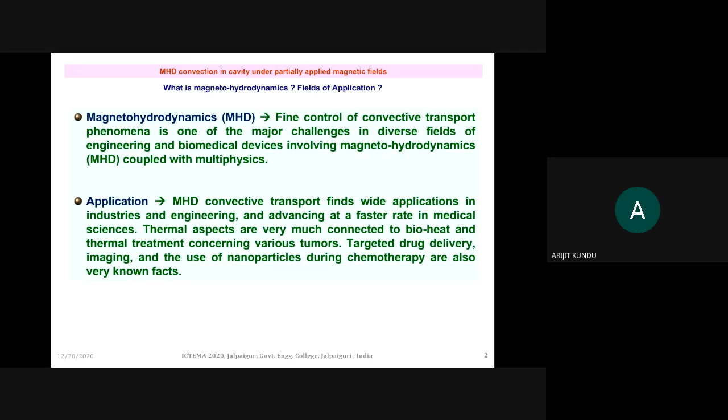Now why has this magnetohydrodynamics been considered? Day by day, although technological advancement is happening, designers are facing tremendous challenges due to miniaturization and the high demand on performance. So to control all these features, researchers are devoting themselves to optimizing performance as well as reducing sizing, so that point is taken care of.

That's why we have chosen a classical problem: a square cavity heated linearly. We have considered a square cavity filled with nanofluid saturated porous media, and we have taken this on to check whether magnetohydrodynamics can affect its heat transfer performance or not in the presence of porous media. That's why we have conducted this study.

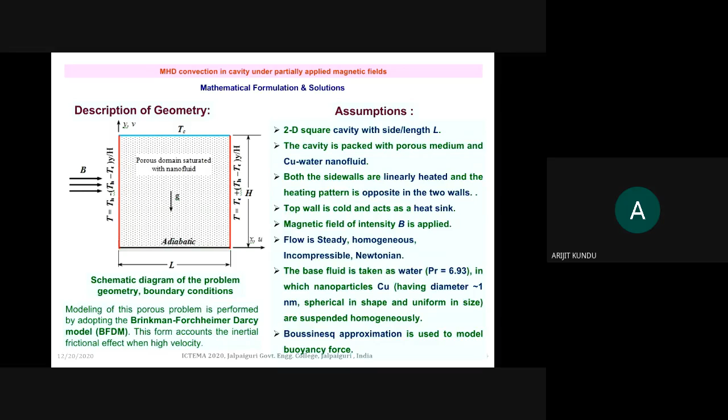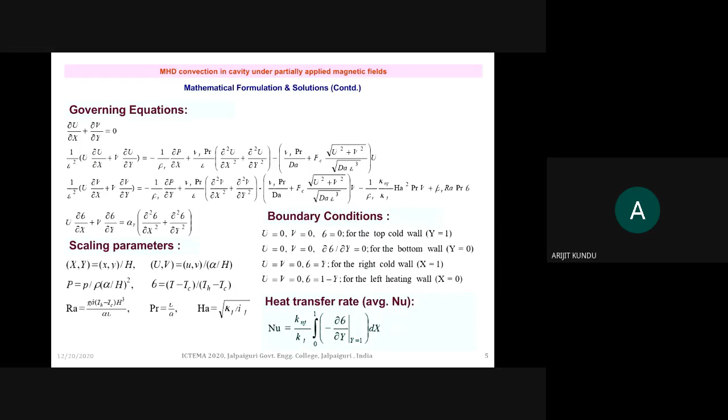Now these are the boundary conditions: isothermal temperature at the heating point, and this isothermal temperature is a function of increasing Y. So at the vertical walls, two different temperature boundary conditions have been chosen, and for presenting the global parameter of the heat transfer rate, the Nusselt number has been defined.

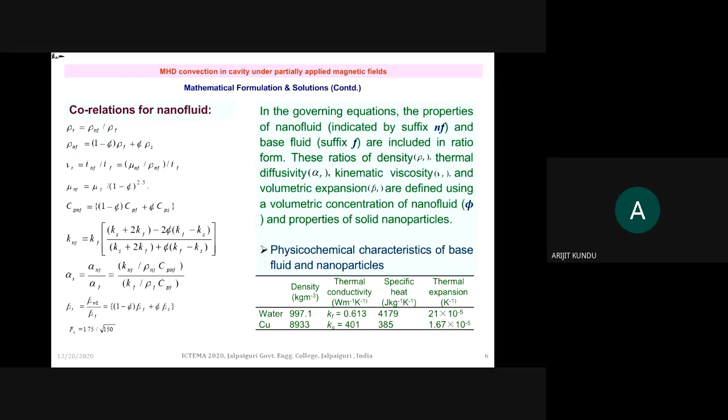Now in the governing equation, some correlations for the nanofluid have been chosen to incorporate the thermophysical properties. From standard literature, we have taken the thermophysical properties of water and copper. We are not going into detail about this.

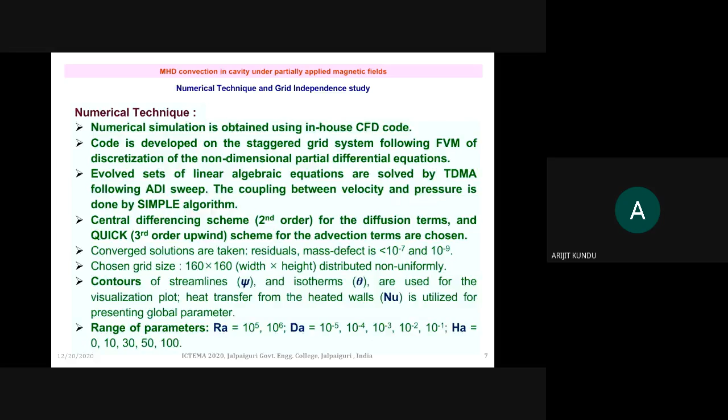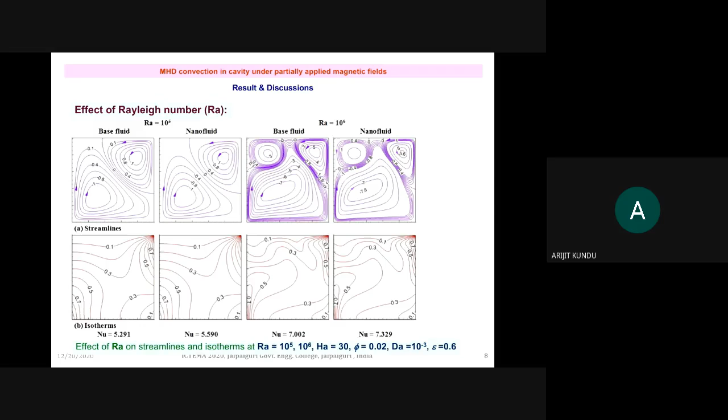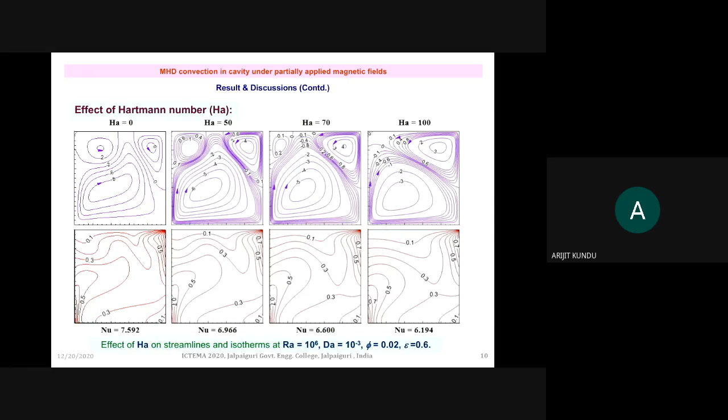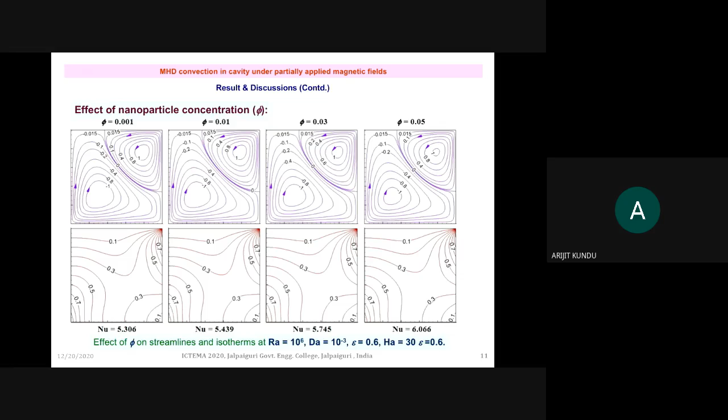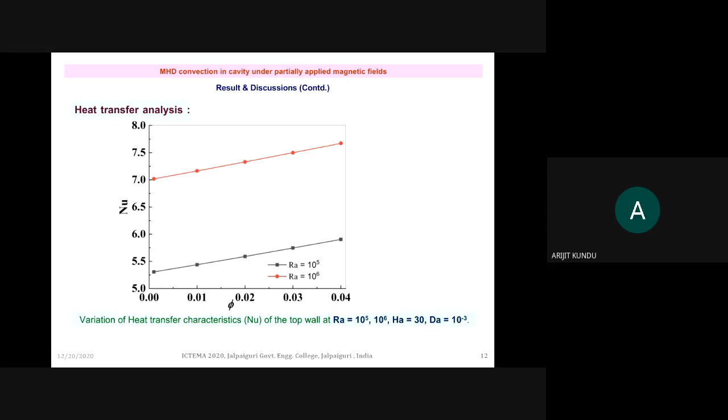From this analysis we can understand that as the Rayleigh number increases, the strength of the flow vortices increases, and this helps improve the heat transfer rate. As the permeability of the porous media increases, resistance to the flow field decreases, so heat transfer rate also increases.

With the inclusion of nanoparticles, heat transfer rate increases substantially. But in the presence of Darcy medium as well as in presence of magnetic field, this heat transfer rate decreases, keeping other parameters fixed. When magnetic field increases, heat transfer rate substantially decreases.

Finally, the effect of heat transfer with increasing nanoparticle concentration shows significant improvement. With this temperature condition, we can realize that the impact of Hartmann number as well as Darcy number have a significant role on heat transfer performance. So the outcome of this study could be helpful for designing new devices, and it will be very helpful for the designer.

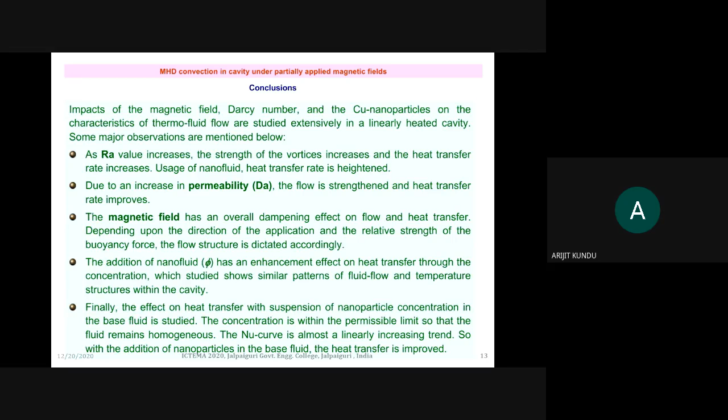So some of the references are presented here, and thank you for listening.

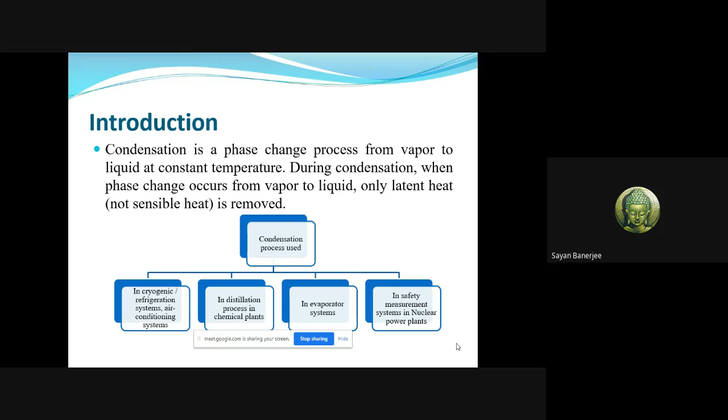This condensation process is used in many systems and processes such as cryogenic and refrigeration systems, air conditioning systems, distillation processes in chemical plants, evaporator systems, and nuclear power plants, especially in safety measurement systems. In nuclear power plants, there are water cooled nuclear reactors such as boiling water reactors and pressurized water reactors, where LOCA, that is loss of coolant accident, appears as one of the main accidental scenarios.

During this situation, due to less water circulation, water vapor is released at very high temperature and high pressure. This water vapor over-pressurizes the containment and threatens its integrity seriously. So the water vapor is required to condense very rapidly to maintain reasonable pressure, and PCCS, that is passive containment cooling system, and containment water spray systems are such systems that provide rapid condensation during this situation. So condensation process is very much required in nuclear power plant safety measurement systems.

Our objective is to investigate the effects of non-condensable gas for laminar film condensation over a vertical flat plate, because in every practical situation, steam always contains some amount of non-condensable gas. These non-condensable gases may be air, helium, etc.

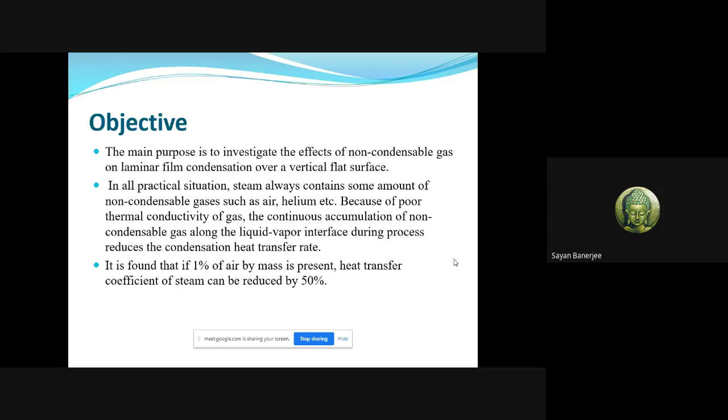So it is our objective to study how the presence of non-condensable gas affects the heat transfer process or condensation process. Here is our model.

This is a vertical wall or vertical plate which is maintained at wall temperature TW. Here the free stream is at U infinity, T infinity, P infinity, W infinity. U infinity is the free stream velocity, T infinity is the free stream temperature, P infinity is the pressure, and W infinity is the mass fraction of non-condensable gas in the external flow.

TW is maintained lower than T infinity, so the condensation process is occurring. Near the wall, we can show a thin liquid film of thickness delta L. Behind this, a mixture layer is generating.

We divided this mixture layer into three parts: the mixture momentum layer of thickness delta M, the mixture thermal layer of thickness delta T, and the mixture concentration layer of thickness delta W. We did not divide the liquid layer because its thickness is very small; rather, we divide the mixture layer into three parts.

Here are our assumptions and simplifications. We consider an isothermal plate, which is vertical and smooth. Steady state incompressible flow is assumed, and laminar flow in both the liquid and mixture layer is considered. There is a no-slip condition between the plate and liquid film, and thermal equilibrium between liquid and mixture layer is considered, with the film interface impermeable for non-condensable gas.

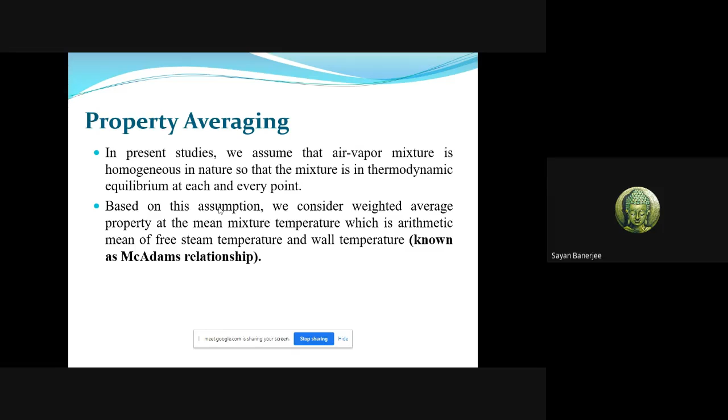We define the arithmetic mean of free stream temperature and wall temperature. So here is our formula: epsilon is the property, any property, it can be density or anything. Epsilon M is the mixture property, epsilon NC is the non-condensable gas species property, epsilon V is the property of vapor, and WNC is the mass fraction of non-condensable gas in free stream.

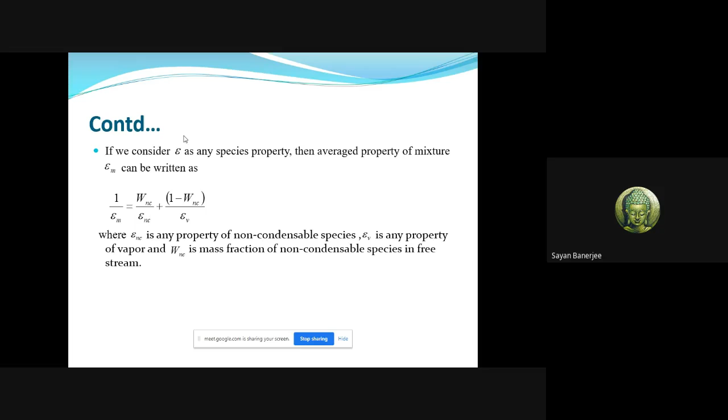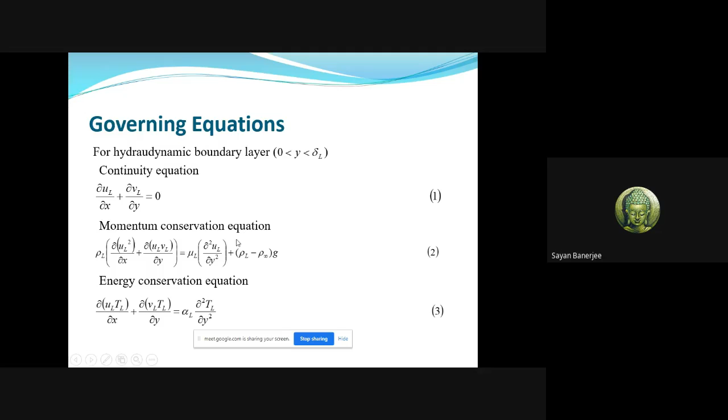Here is our governing equation. For the liquid layer, we define this continuity equation, momentum conservation equation, and energy conservation equation. For the mixture layer, continuity equation is this, and momentum conservation equation is valid from delta L to delta L plus delta M, that is in the mixture momentum layer. Energy conservation equation is valid from delta L to delta L plus delta T, that is in the thermal layer.

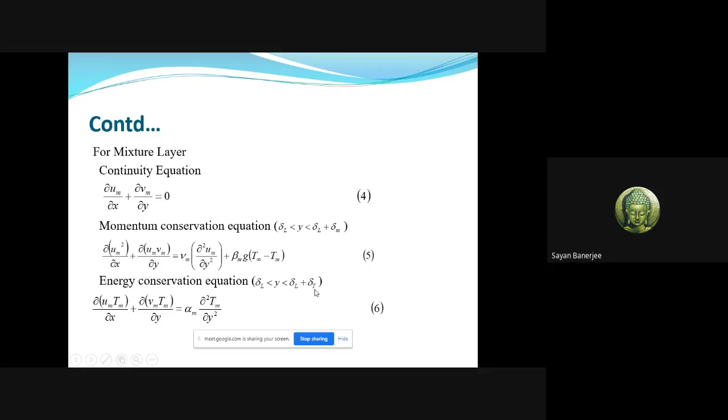This is the energy conservation equation, and this is the species gas concentration conservation equation from delta L to delta L plus delta W. Also, we know that total mass fraction is 1, that is mass fraction of non-condensable gas and vapor. From this we can define only one species concentration equation. Then from this equation 8 we can also define the conservation equation of vapor.

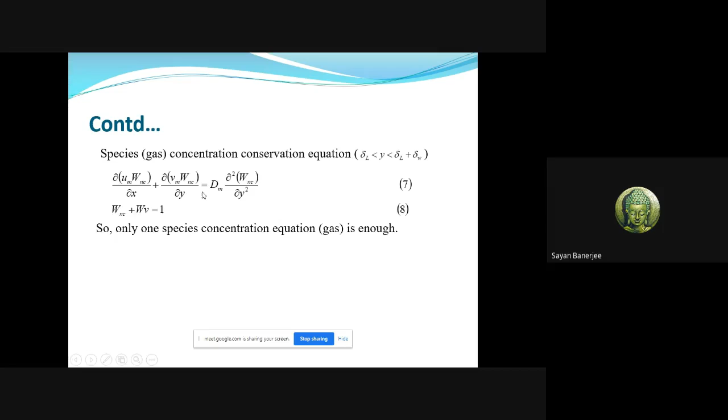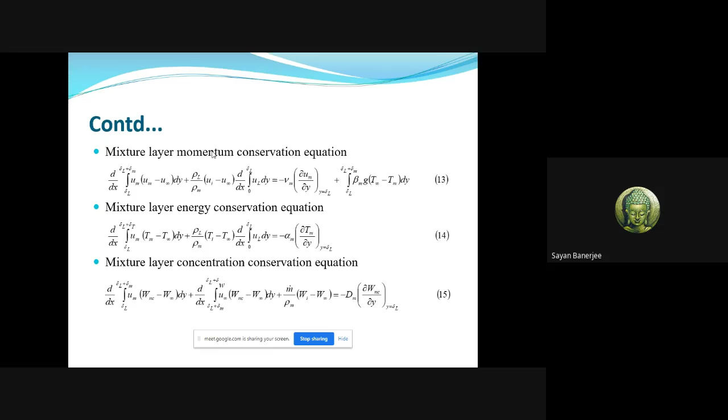This is for mixture momentum conservation, mixture energy conservation, and mixture concentration conservation. Then we assume some suitable profiles. This is the liquid layer velocity profile, a cubic profile, derived with the help of boundary conditions.

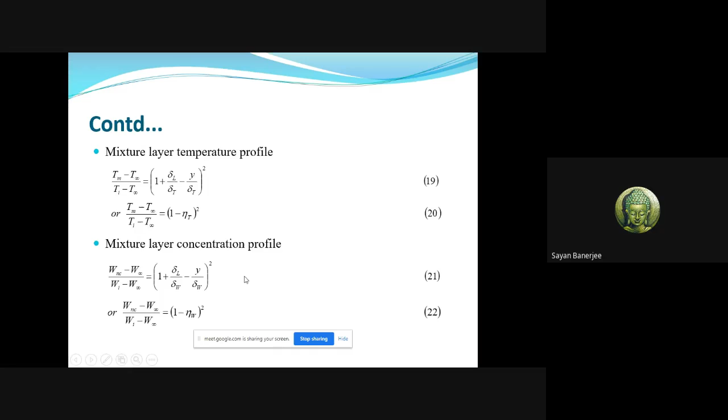This is the liquid layer temperature profile, a quadratic profile. The mixture layer velocity profile is also a quadratic profile we assume. This is the mixture layer temperature profile, and this is the mixture layer concentration profile, all assumed as quadratic profiles. Only the velocity profile is assumed cubic because the thickness of the liquid layer is so small; otherwise it would be a linear profile. So we assume a cubic profile.

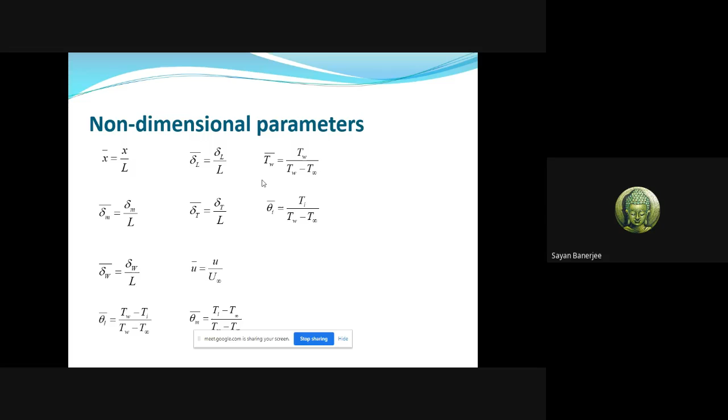These are some non-dimensional parameters we consider, and these are some non-dimensional numbers we apply in our study. Reynolds number L is for the liquid layer, M is for the mixture layer. This is Reynolds number for the liquid layer, and this is Reynolds number for the mixture layer. We also apply Prandtl number, Peclet number, Jakob number, and Grashof number in our study.

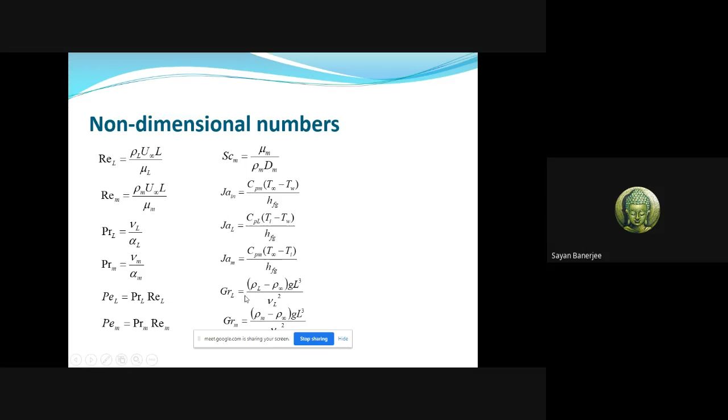We have 4 variables: delta L bar, delta M bar, delta T bar, delta W bar, all non-dimensional parameters, along with Ti, Wi interface temperature and gas concentration mass fraction. In our profile assumptions there are some variables, d1 and c2, seen in the liquid layer velocity profile and liquid layer temperature profile, which we also consider as functions of X.

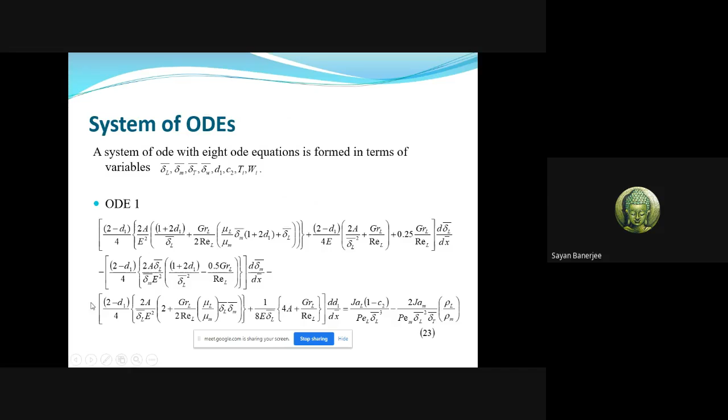So we have 8 variables, and we need 8 ODE equations. We put this velocity profile, temperature profile, all of it into the governing equations, and in this way we generate 8 ODE equations. These are ODE1, derived from the liquid layer continuity equation, and similarly ODE2, ODE3, ODE4, ODE5, ODE6, ODE7, ODE8. We form 8 ODE equations and solve them in MATLAB using the ODE solver ODE23TB.

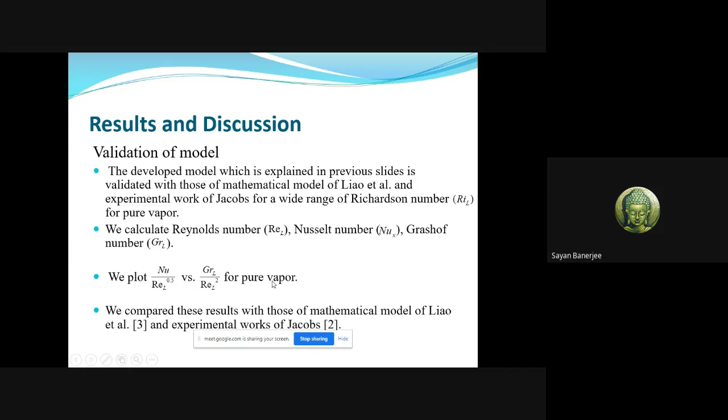For the validation, we extracted the results and calculated Reynolds number, Nusselt number, and Grashof number for the liquid layer. From that we plot Nusselt number by Reynolds number to the power half versus Grashof number by Reynolds number square. Grashof number by Reynolds number square is Richardson number, which is also a non-dimensional number. We compared our results with the mathematical model of Liao et al. and experimental works of Jacobs.

So we compared our results in this way, and this is the velocity profile. The red color is the mixture velocity profile, and the blue color is the liquid velocity profile.

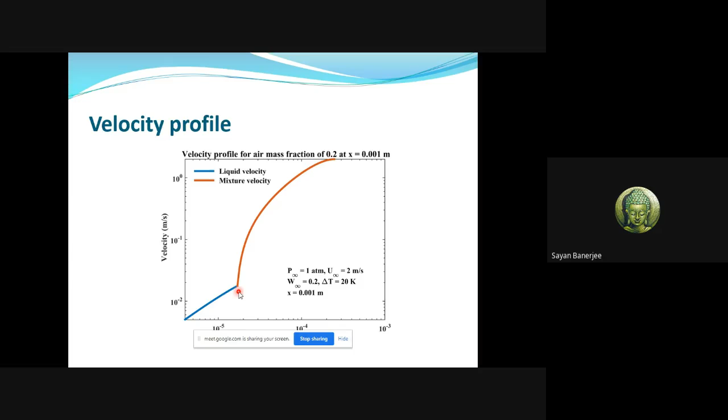It appears as a linear profile, but actually this is because of the very thin, small thickness of the liquid layer. So it is actually appearing as a linear profile, but it is not. This is the mixture velocity profile.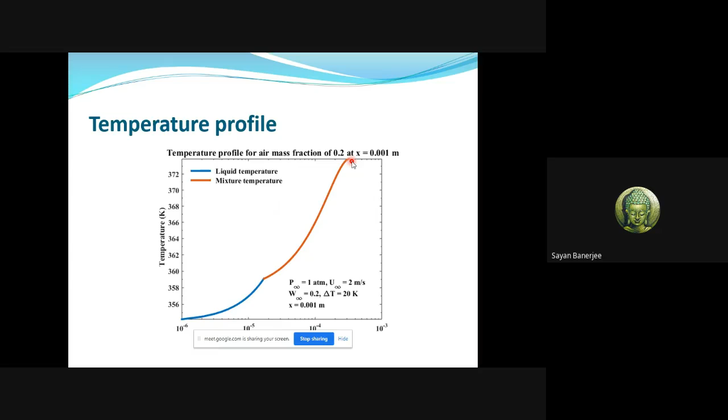This is the liquid temperature profile, and also the mixture temperature profile, and this is the liquid temperature profile at the interface. At the wall it is TW that we maintain, and this is achieving the interface temperature. This is the concentration profile.

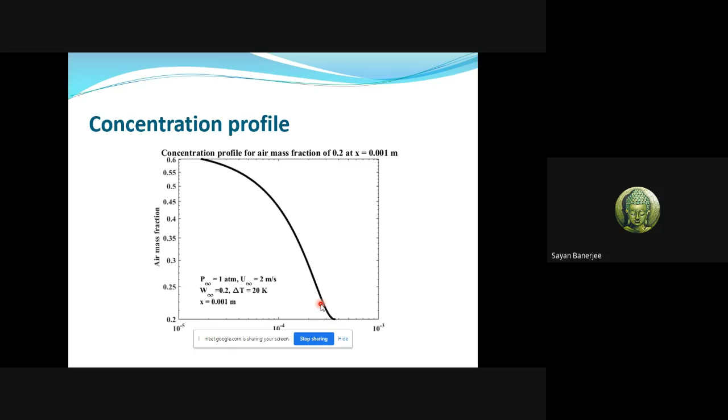In the liquid layer there is no concentration profile, it is only in the mixture layer. So it ends at this point. This is the interface temperature, interface concentration profile.

As we know, non-condensable gas continuously accumulates at the liquid vapor interface, so the concentration, that is the mass fraction of non-condensable gas, continuously increases. So we can see an increasing profile.

As the mass fraction of non-condensable gas, in our study air, continuously increases, the concentration of vapor will continuously decrease. So the partial pressure of vapor will be continuously decreasing, and then the temperature will be continuously decreasing.

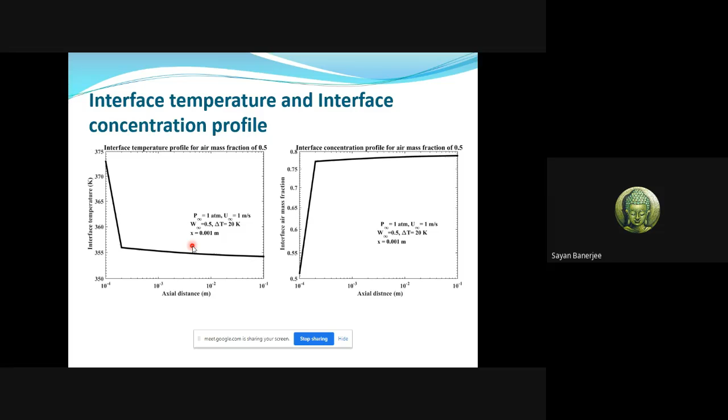So when the interface temperature continuously decreases, our driving force for the condensation process, that is the temperature difference, will be continuously decreasing. That is why it affects the condensation process.

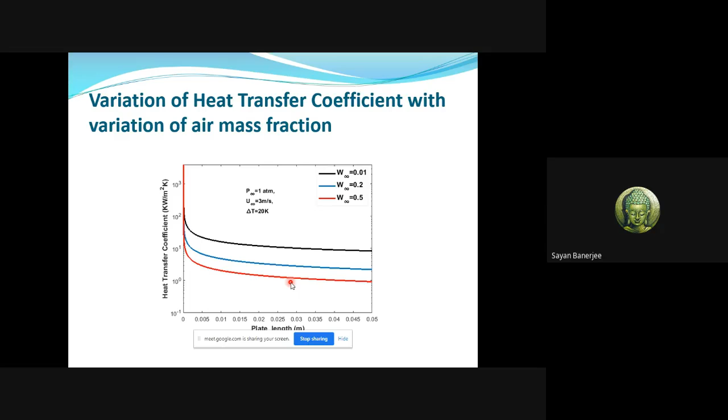We can see that when we vary our non-condensable gas mass fraction from 0.01 to 0.5, it continuously decreases in this way, continuously affecting the condensation process as the non-condensable gas increases.

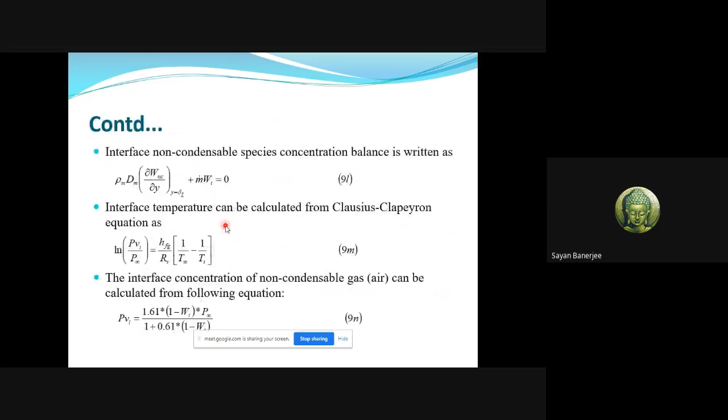We apply interfacial conditions, some interfacial mass balance, interfacial shear balance, in a cell, suppose.

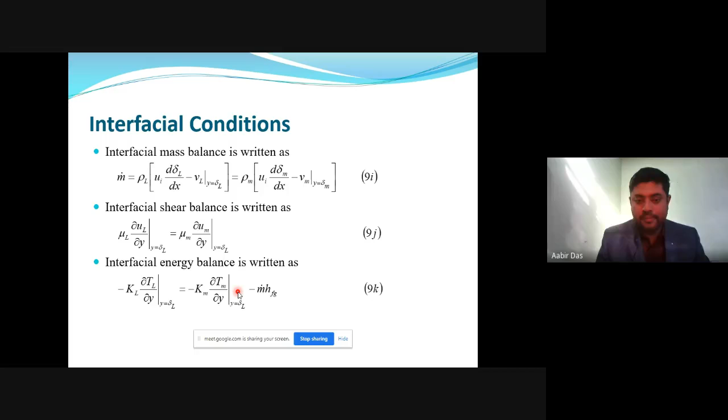Yes sir. So in a cell, suppose, at the interface there will be one cell partially filled with fluid, both the liquid and gas. So to find out the density of that cell, which method have you used?

Actually, this is our analytical model, not a computational model, CFD model. Okay, yes, this is our analytical model.

Any question? Sanchayan sir, okay. I have one query. Yeah, please.

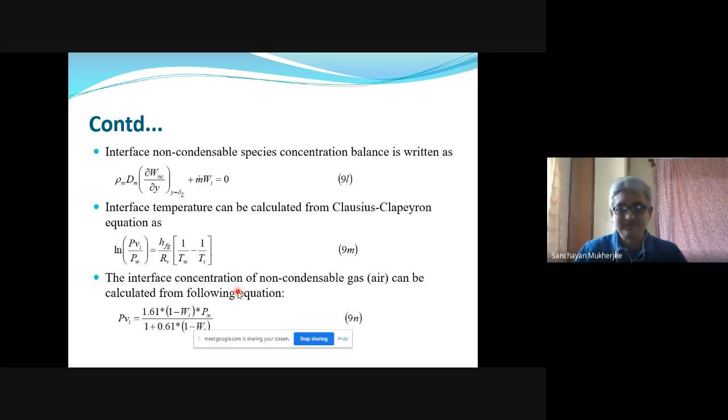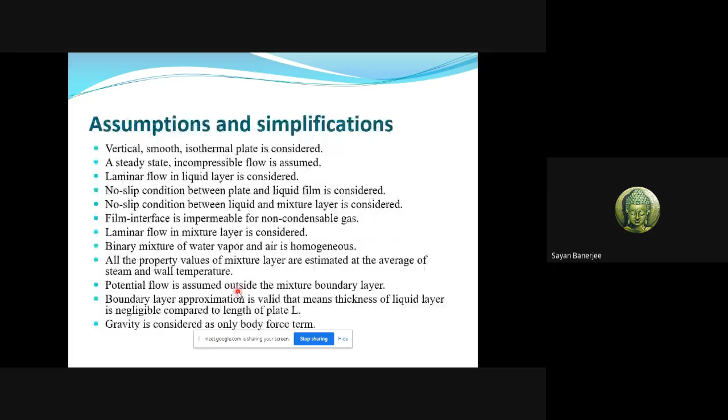Actually Sayan, the thing is that you have divided the mixture layer into three segments, but not the liquid layer. Is it only due to the small thickness of the liquid layer, or is it something else?

Yes, small thickness of the liquid layer.

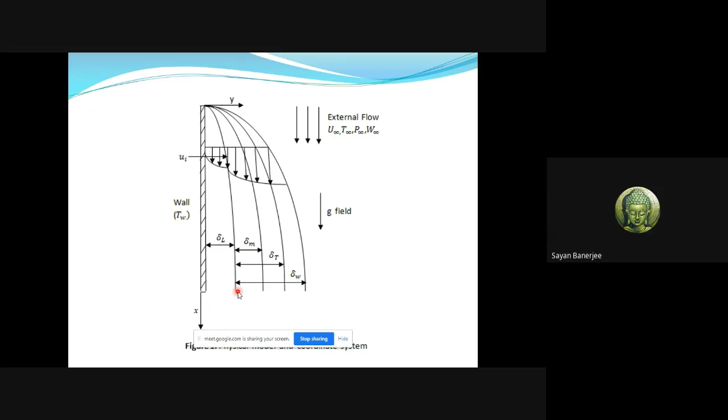For the interface, you have used assumed profiles. Are these profiles collected from literature? No, no. First we assume UL by UI in non-dimensional form, so UL by UI equals A1 plus B1 eta plus C1 eta square plus D1 eta cube. Then we used the boundary conditions to find the constants out.

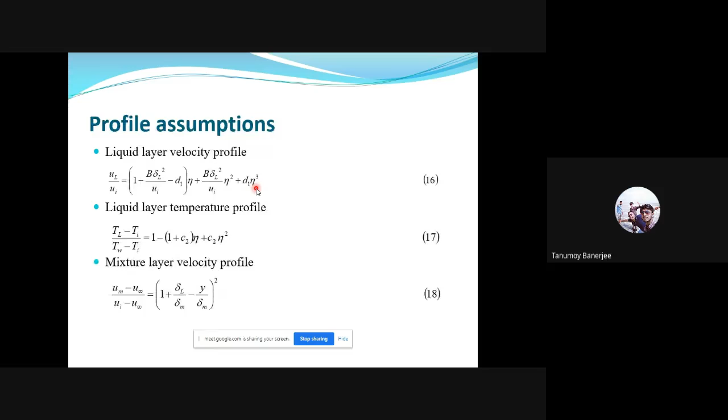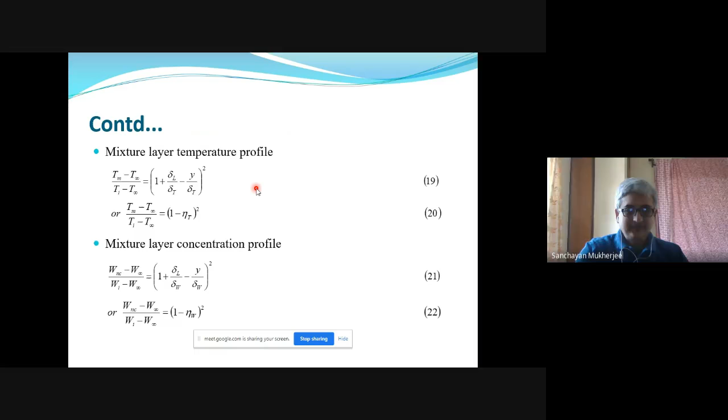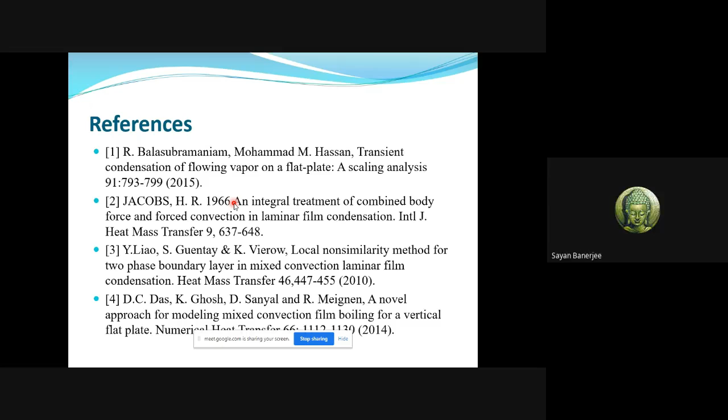So I have one small observation, not a question. Whenever the graphs are presented, you have rightly pointed out the previous research work and validated with them, like Liao, Jacobs, etc. My humble suggestion is that please provide the year of publication also within parentheses, that will help, since sometimes the same author publishes several papers.

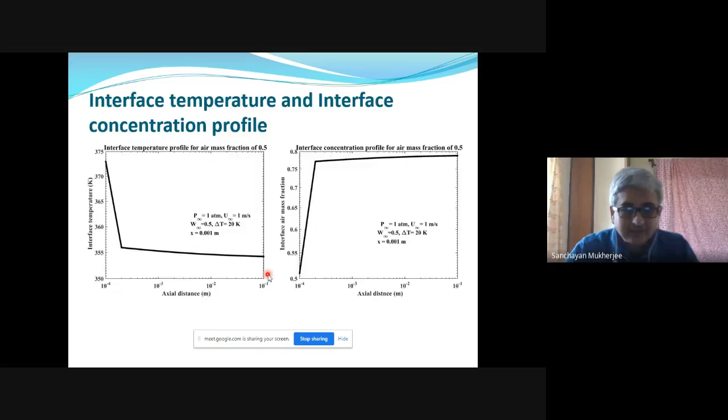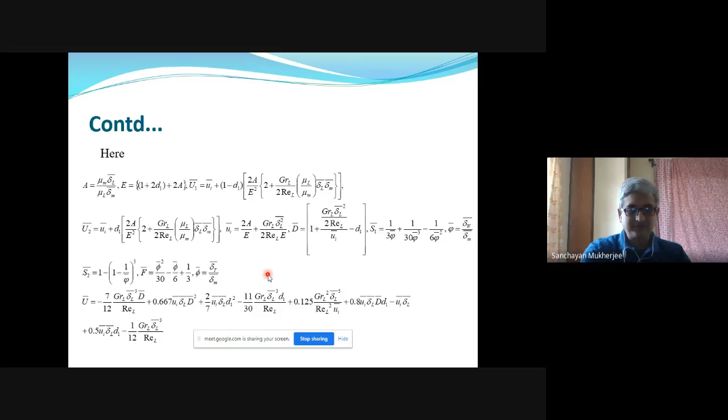Thank you, and also you have very laboriously done the work. The only thing is, particularly, how would you use your work in reality? You have assumed some profile and did all the validation, but how would you use your result in real life? Suppose you gave the graph to somebody, would he or she use the work readily, or what is your suggestion?

Yes, in reality we assume lots of assumptions, and this is one type of analytical work. So in reality this may not be directly applied, because in our work we assume plate length that is very small, in the range of 10 to the minus 3 to 10 to the minus 2 meters. In reality, the plate length cannot be so small, so there is lots of difficulty in directly using it.

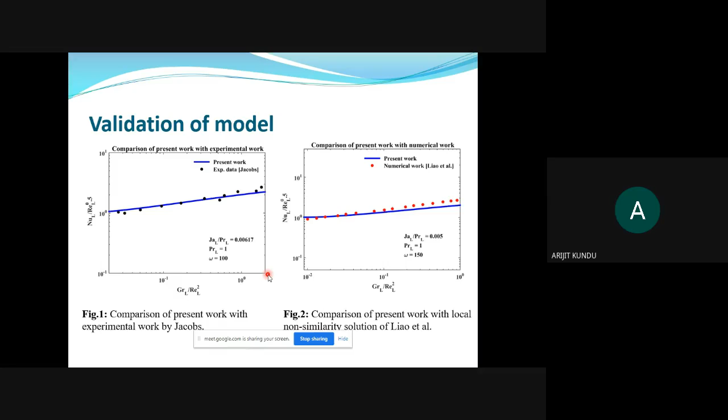Also, since it is a vertical plate, it is very difficult to ensure that the small thickness of the liquid layer would be entirely filled up with liquid only. That is also, I think, one problem, so that may be your future scope if you want to go ahead with some more modifications and developments.

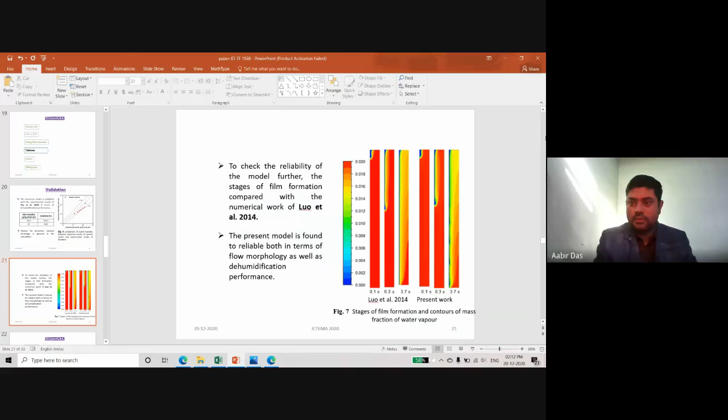Sir, can you see the screen? It's clear, okay sir. Good afternoon to all the teachers. So here I am going to present my paper on liquid desiccant dehumidification. My paper title is The Performance Evaluation of LiCl and CaCl2 based falling film dehumidifier with surface modification. My co-authors are Rajat Subra Das and Kaushik Das. These are my outlines: first I will describe the needs of the liquid desiccant system, then give an overview of the differences between the conventional vapor compression system and the liquid desiccant system. Then I will introduce how the falling film contactor works in the liquid desiccant dehumidification system, followed by validation of my work, results, and bibliography.

So in general, we spend most of the time at our home. The energy consumed to maintain the environment, specifically the temperature and humidity for the room, is almost 41% of primary energy, and 50% of that is consumed by the air conditioning and ventilation heating system alone.

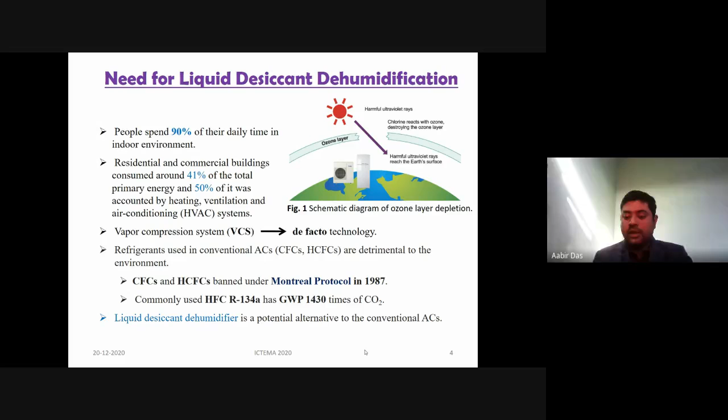This liquid desiccant dehumidifier can be a potential alternative to the conventional air conditioning system.

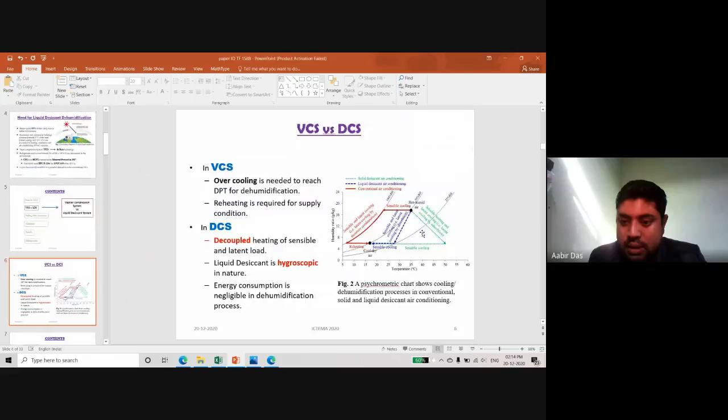Now from this graph you can see, let me zoom it on. If we use the conventional air conditioning system, if this part is our outdoor air, then first the outdoor air has to be cooled up to the saturation line, then the required moisture will be removed, then it has to reheat back to the room temperature. So a lot of energy is wasted.

So we prefer to use the liquid desiccant system, as it does not especially require electricity or fossil fuels. We can use any waste heat or low grade energy like solar energy to drive the system.

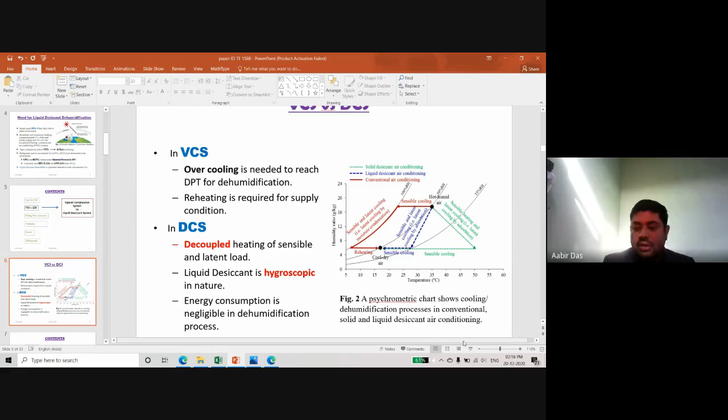Also here the sensible and latent heating loads are decoupled, meaning we can cool and dehumidify separately. The property of liquid desiccant is hygroscopic in nature, meaning it absorbs moisture. The liquid desiccant is basically salt, so it tends to absorb moisture from air. So we use that property of the material to dehumidify the air.

Now, a falling film contactor is just a vertical plate or vertical channel where, through the wall, the liquid desiccant will flow down under the action of gravity, and on the other side the air will flow counter to the solution.

While flowing counter to the air, the liquid desiccant absorbs moisture and gets diluted. Then the diluted liquid desiccant is sent to the regenerator, where it is heated and rejuvenation is done there. So again we make it concentrated for the inlet.

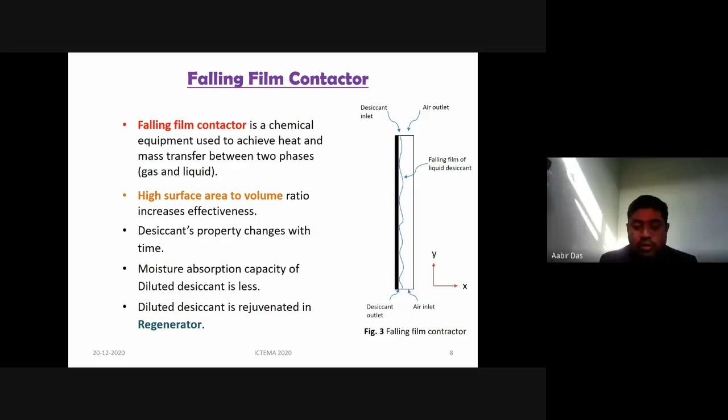Now, one main advantage of this is that this falling film contactor has a very high surface area to volume ratio, which helps in the interaction of liquid and gas.

These are some of the important literature reviews that have been done here. Grossman studied the fully developed laminar flow in an inclined plate. Then Banerjee et al. did a two-phase model with some user-defined function in ANSYS Fluent. Then similar work was done by Luo et al., where he extended this work and developed some more robust formulation to solve the problem.

Then again, Luo et al. did internal cooling, where water will be flown to maintain the temperature of the liquid wall. Then Wen et al. developed a quasi-3D model where he considered the shrinkage factor to give a more realistic condition to the numerical model.

Gaps in the literature: while the desiccant absorbs moisture, at every instant the property of the liquid desiccant will change. But most of the earlier work has not considered this change in property, because it is very tough to use in a numerical model. Then most of them use steady state assumptions, but the problem itself is very transient in nature. So it also gives approximate results.

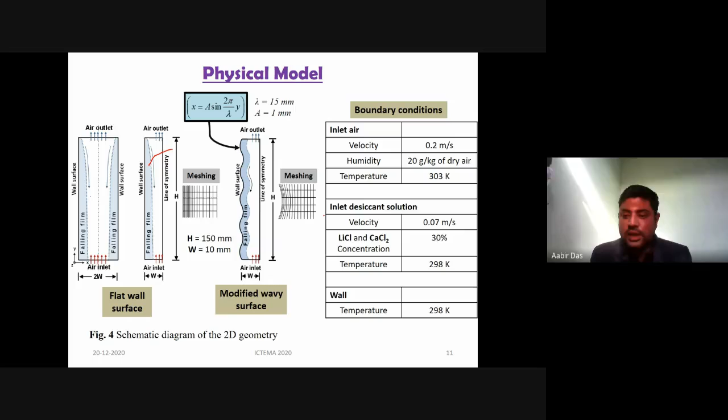LiCl and CaCl2 are the most commonly used liquid desiccants, and we have taken 30% concentration of both. The temperature is taken around room temperature, that is 25 degree, and the wall temperature is also kept constant at 298 Kelvin, that is 25 degree.

These are the governing equations. Basically, this problem needs four governing equations. First one is the mass conservation, then the momentum, then the energy, then the species transport.

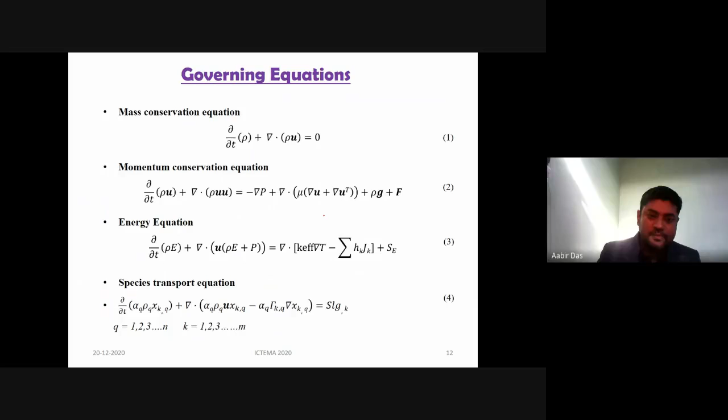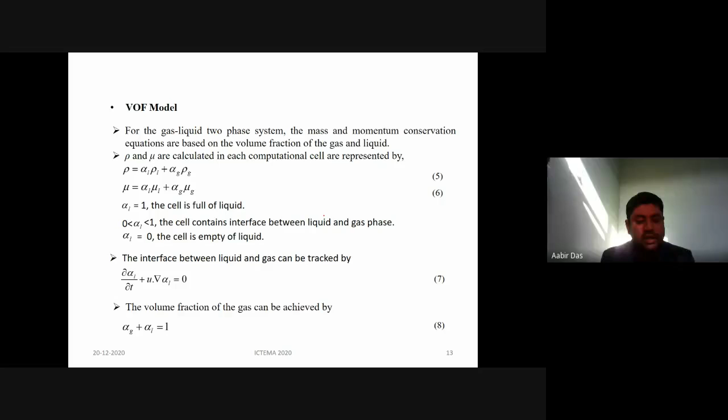The volume fraction of gas is achieved by alpha G plus alpha L.

Now, the interface condition. When the solution absorbs moisture, the driving force of that is equation number 9, where the equilibrium humidity is defined by the vapor pressure of the solution, and we know the inlet air humidity.

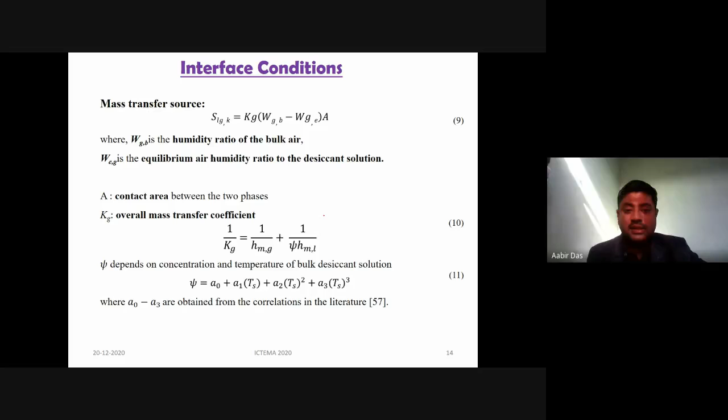These equations are put in a UDF and written in C program. Then it is hooked in Fluent. This is the ANSYS Fluent solver used to customize our problem.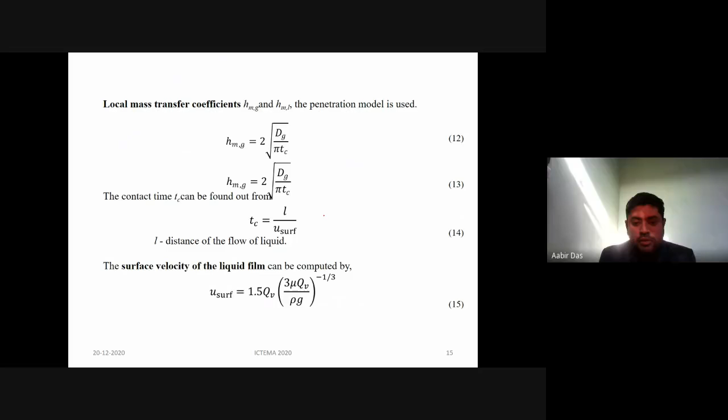These are the local mass transfer coefficients, and the surface velocity of the liquid film can be found out by U surface equals 1.5 Qv into 3 mu Qv by rho g.

Here I have explained how the equilibrium humidity of the solution is calculated.

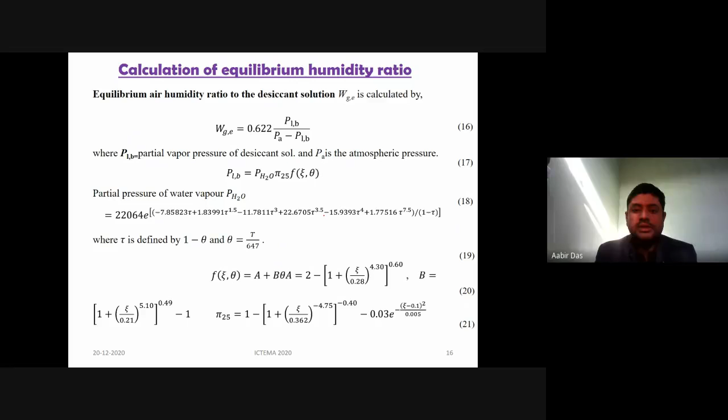The energy source, as I have told, when the water molecule diffuses in the solution, it will release the latent heat. So that latent heat is given by the energy source term.

Now, how does the UDF work? First, Fluent will take the cell variable like density at that point, then it will give it to the UDF. Then the UDF will calculate the updated values.

Then it is again sent to Fluent. So in that way, like density, viscosity, thermal conductivity, specific heat, mass transfer source, energy source, all these things are being written in user-defined functions and are updated on a time basis.

Now, here we have done a 2D transient conjugate heat and mass transfer problem, where finite volume is used to solve the governing equation. Then volume of fluid is used to track down the liquid-gas interface. The time step is kept around 10 power minus 5 to get a stable solution.

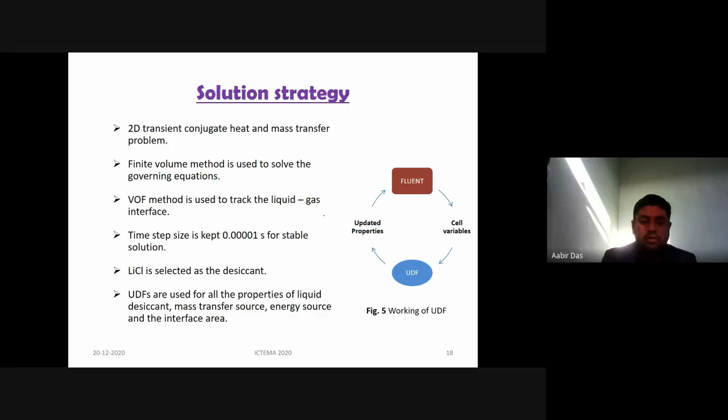The liquid desiccants LiCl and CaCl2 are used to run the program.

Validation: the validation is done with the experimental work of Tao et al. 2019. Since we have done the 2D analysis and have not considered the shrinkage factor, like when the solution flows through a wall, it tries to shrink, that shrinkage is not considered here.

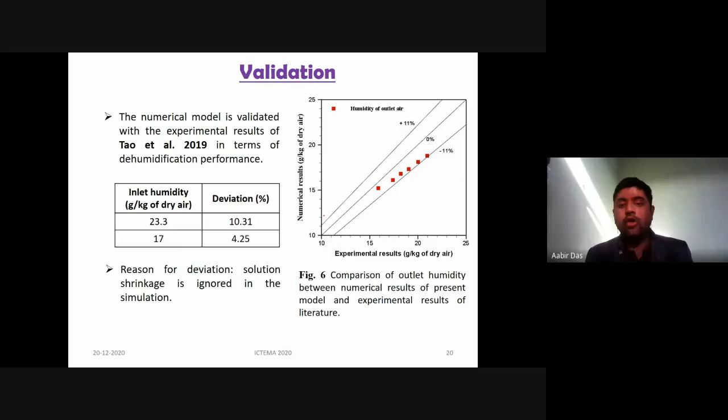So our result shows a 10.31% deviation at max, and at the lower end it is showing 4.25%. The parameter outlet humidity was selected for the validation.

Now, to make our model more robust, we have compared the time basis comparison of our present model with Luo et al. of 2014, where we have seen each and every step matches with Luo's work.

How the film flows with time is also being matched with Luo's work, and it gives a very good matching with the literature work.

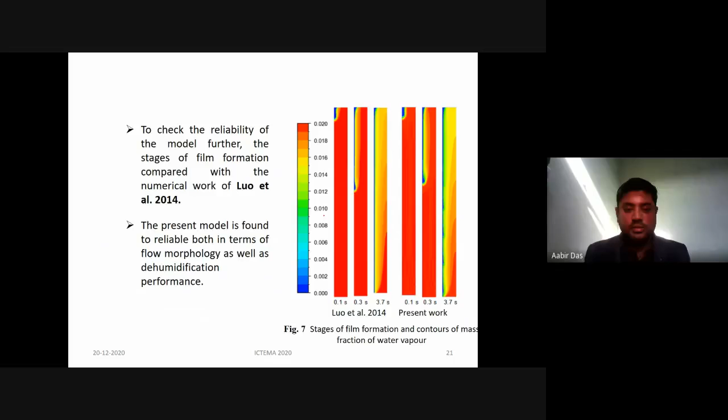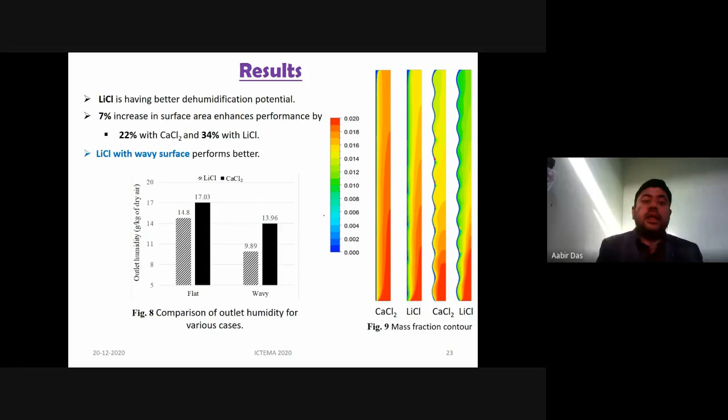So here we have compared the CaCl2 and LiCl for both the flat and the wavy case. We found that LiCl gives 22% for CaCl2 and 34% for LiCl, with an increase of 7% in surface area. When we took the wavy surface, we kept the overall area in the channel fixed, but the surface area is increased by 7% for the wavy case. So we found that the combination of LiCl with the wavy surface performs better.

Now, to further understand the physics of that, we analyzed the mass fraction gradient at the midpoint of the channel, checking how the dehumidification or mass fraction gradient varies across the x direction. We found that the wavy profile of the surface increases the film thickness by 21.7% and 12% for LiCl and CaCl2 respectively. From the graph, up to a distance of 4.65 mm for LiCl, 4.64 mm for CaCl2, 5.6 mm for LiCl, and 5.2 mm for CaCl2, the film maintains a uniform mass fraction gradient of 2 per meter. This means we can calculate the film thickness throughout the plate using this method.

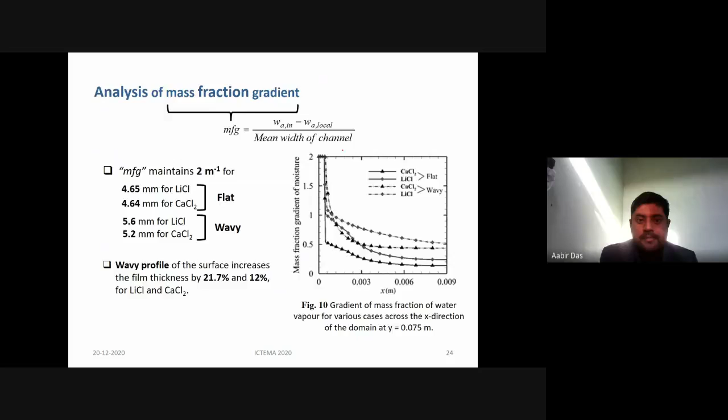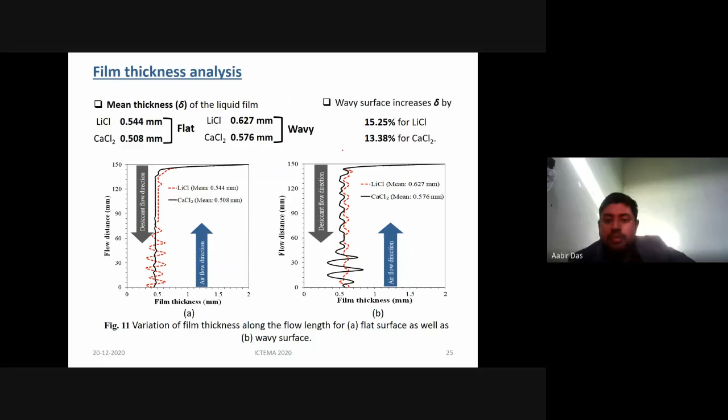This we have done in the next slide. Here we took the same method to track down the film thickness variation throughout the domain, and how it changes with time. You can see the film thickness of LiCl is higher than that of CaCl2 for both flat and wavy cases. This is solely because LiCl is a much denser fluid than CaCl2, which we took from the Conde paper. We found that LiCl has more density and viscosity than CaCl2. The wavy surface enhances the film thickness by 15.25% for LiCl and 13.38% for CaCl2 compared to the flat wall surface.

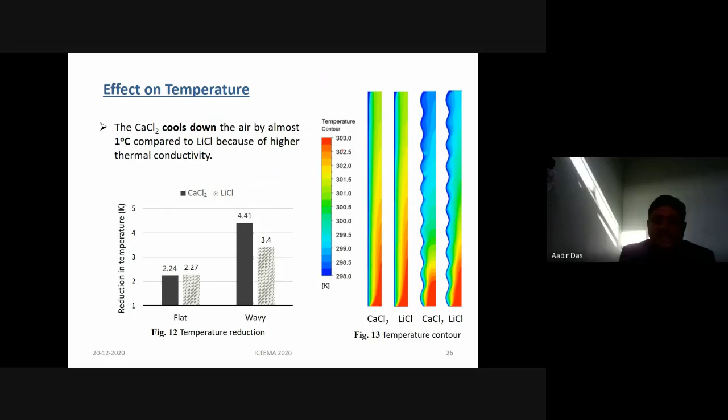Now, temperature is a very important part in a liquid desiccant dehumidification system. We found that CaCl2 performs better in terms of cooling. The CaCl2 reduces the outlet air temperature by 1 degree, whereas LiCl could not reduce that temperature. This is solely because of the higher thermal conductivity of CaCl2. The whole process can be visualized from this psychrometric chart, where the lines are given in the legends.

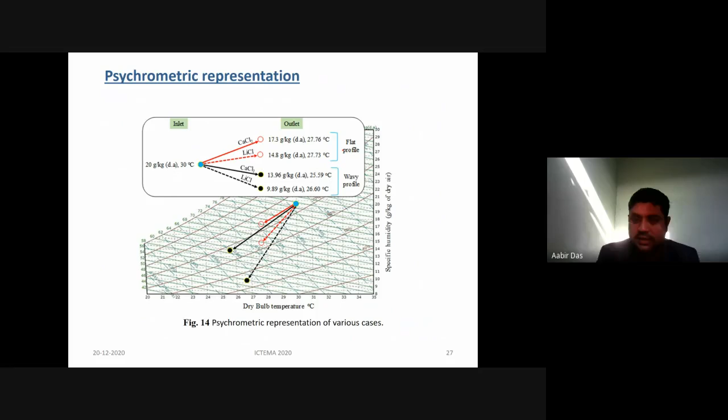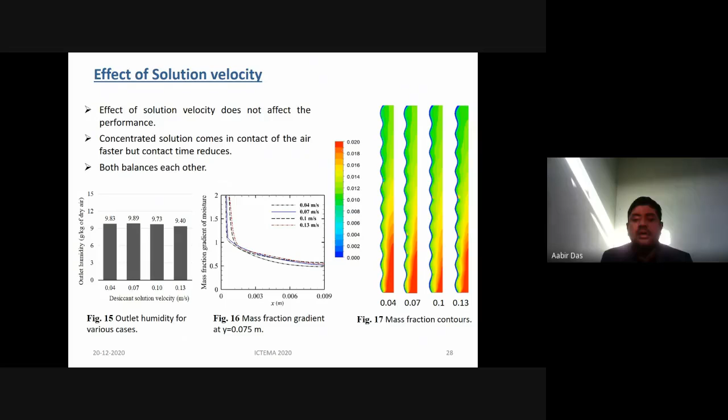Now we tried to analyze the effect of solution velocity on the dehumidification effect. We found that solution velocity does not affect the dehumidification. I think this is because when we increase the solution velocity, fresh fluid with higher concentration comes in contact with the air, but the air gets very less contact time to transfer moisture to the solution. These two actions counterbalance each other, so we get very little change in results with changes in solution velocity.

In conclusion, the numerical solver is validated with 10.31% deviation from the experimental data. The LiCl solution gives better moisture removal capacity. The dehumidifier with LiCl solution and flat wall gives 26%, whereas the wavy wall with LiCl solution can remove moisture up to 44.85%. The CaCl2 solution in both flat and wavy wall can remove up to 13.5% to 30% moisture respectively. So wavy wall in combination with LiCl gives the better results. CaCl2 is found to be more effective on cooling of the air than LiCl. The effect of solution velocity is found negligible in this work.

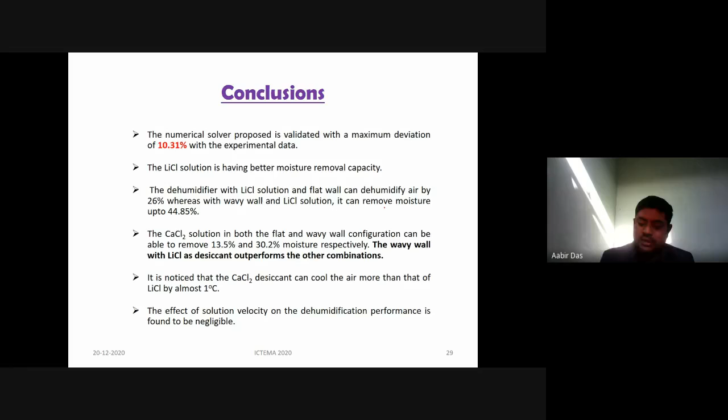Okay, thank you. So is there any question from the audience? If any. Yes, sir. You can ask any question.

Okay, Aabir sir, I have some question regarding the applicability of your work. It's a rigorous work, I suppose. Thanks for that. So my question is vis-a-vis practical air conditioning plants based on vapor compression systems. First question is, what about the efficiency of the desiccant cooling system compared to the conventional air conditioning plant? I suppose this is less costly, but what is the efficiency? Have you measured the efficiency?